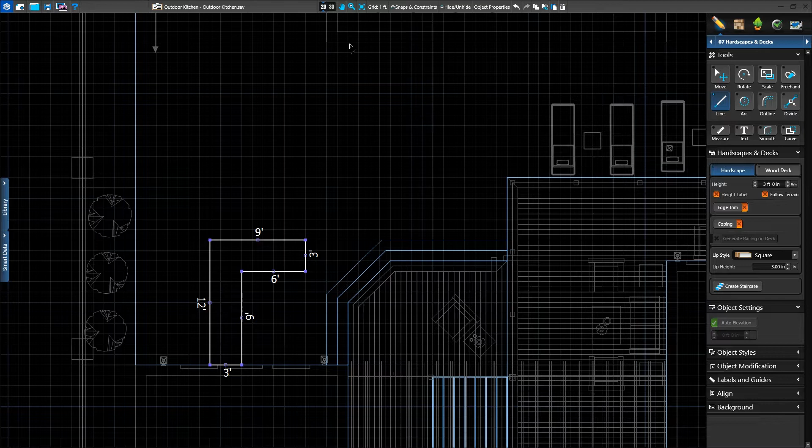With the line tool, we'll plot our dimensions. If we know them, we can even type them in using type-in measurements. Once our shape is complete, we'll make sure that it's set to the hardscape setting and set a height of 3 feet. In 3D, we see our 3-foot tall structure, which automatically includes the countertop.

The countertop is 3 inches tall, and we can adjust the size and style by adjusting the lip settings in 2D. We can adjust our lip height and choose a style. We can even draw a custom lip style.

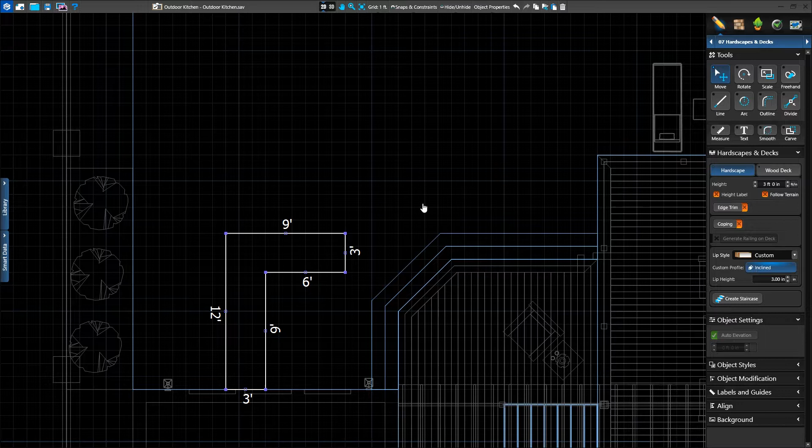Simply draw the lip profile you want with the flat side on the left and save it to the lip style category in the library. Now with our shape selected, we'll choose the custom option from the drop-down menu and apply the new style found in the library. Back in 3D, we see our custom lip.

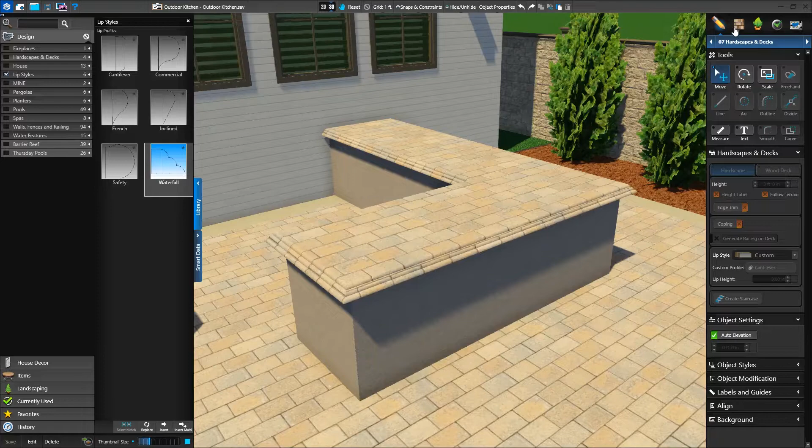Our countertop used the last material applied to a hardscape, so we'll head to the material stage and apply something more suiting for an outdoor kitchen. We'll use a granite or whatever material you'd like to use for the countertop.

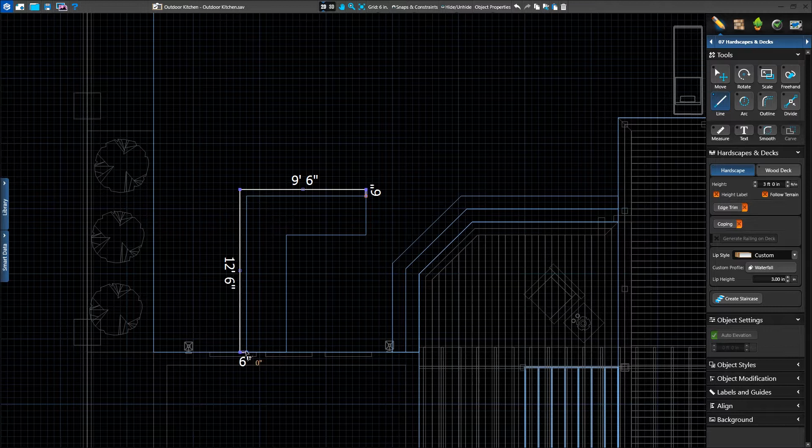Next, we'll create a bar height countertop for bar stools. First, we'll create the wall to support the bar countertop. Using our drawing tools, we'll create a 6-inch wide shape that goes behind the base of our kitchen.

We'll set the lip style to near flush and reduce the size to 1/4 inch, as we don't want to see a visible lip on this portion. We'll set the height of the shape to 4 feet and take a look in 3D.

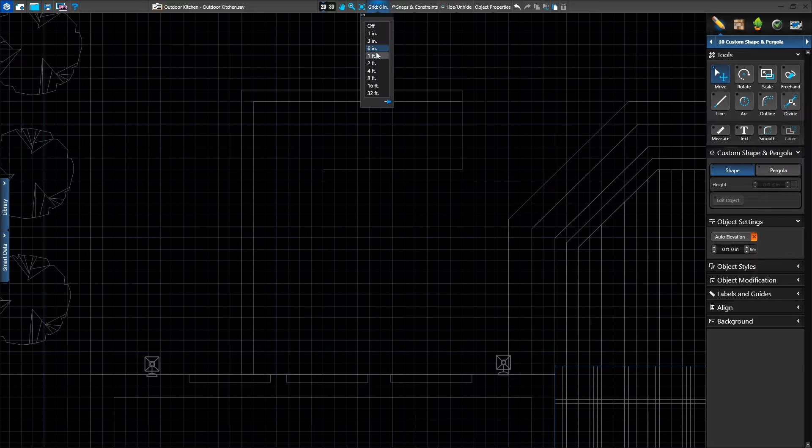Next, we'll create our countertop. We'll do this in the Custom Shape stage. Once in custom shapes, we'll use our standard drawing tools to create our bar top.

Because we created this as a custom shape, we can adjust all of our settings in 3D. We can either move the countertop where we need it in 3D or set the elevation to 4 feet in the panel. We can also adjust the height or the thickness of the counter.

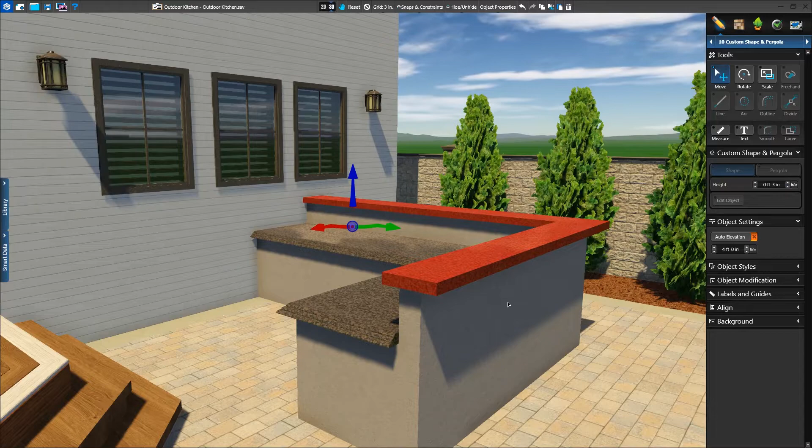Now that our structure is complete, let's start adding accessories. In the Yard Accessories stage on the Item tab in the library, we'll find Outdoor Kitchens.

First, we'll add a grill. We'll pick our favorite and double-click to place it on the countertop. We'll rotate it in 2D and perfect its location in 3D. In 3D, we can use the Move and Rotate tools to put it in place. We'll lower it into the counter and make sure it's where it needs to be.

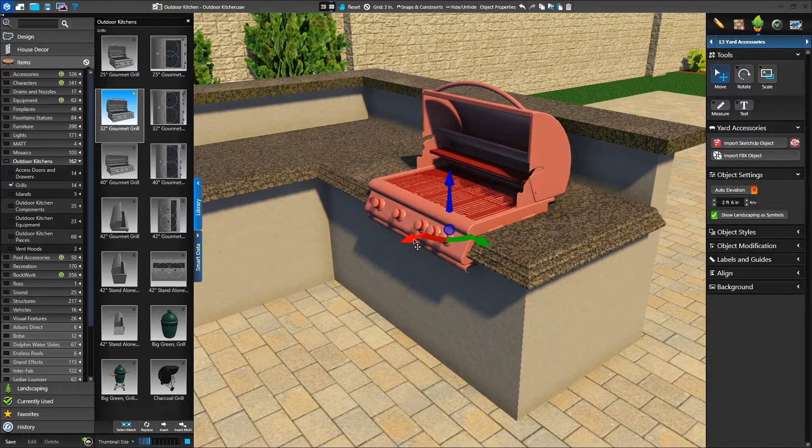It's time for us to add some fire. In the library, we'll open the Visual Features category. Once the fire is placed, we can adjust its settings in the menu. We'll put the fire in place and adjust its height and radius. We'll copy and paste our fire to add it to the other side of the grill as well.

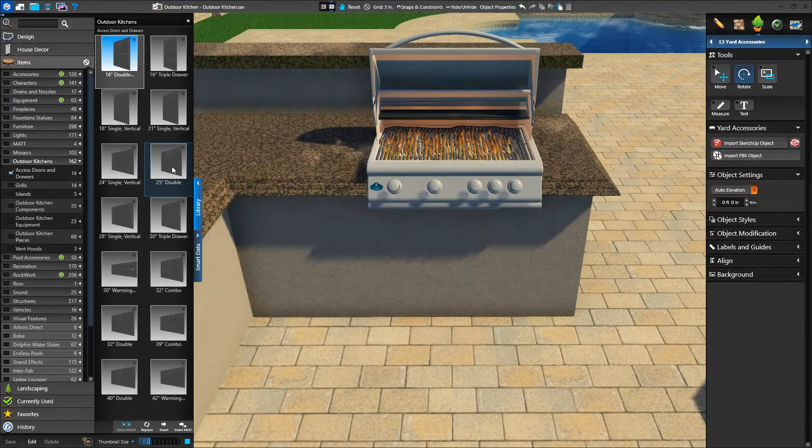Next, we'll add a door. We'll choose the size we want and put it in place. We can use Move and Rotate to position it perfectly. If it's not quite big enough, we can use Scale until it's the perfect size.

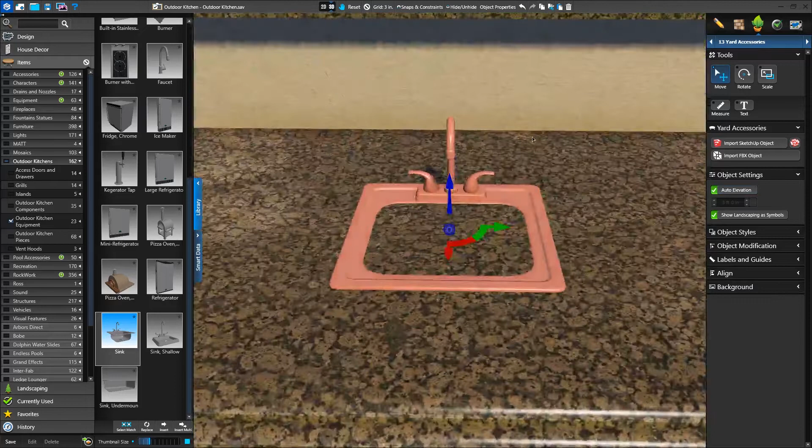We also want to add a sink to our counter. We'll turn Auto Elevation on, or we can adjust the value in the panel menu. We see the countertop goes right through the middle of our sink, so we'll go back to 2D and draw a hole for our sink to fit into.

First, we'll return to the Hardscapes and Decks stage. For the next step, Pool Studio and Vizterra users will simply draw another hardscape, while VIP 3D users will access the Carve tool. When in Carve mode, we can draw holes inside of shapes we've already created.

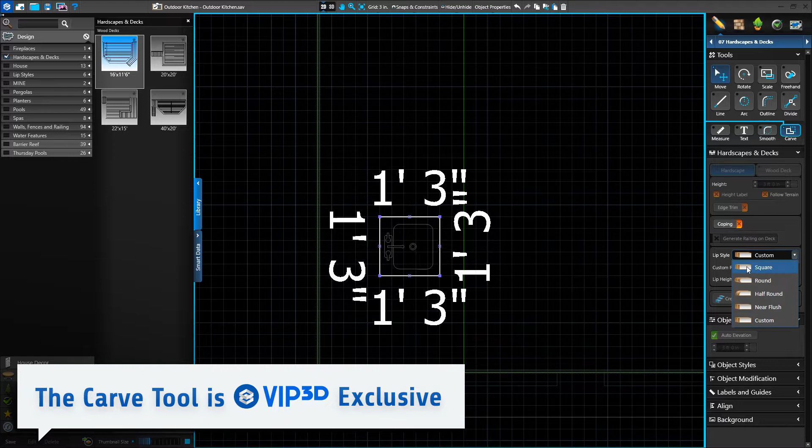While in Carve mode, we'll use our Line tool to draw around the sink. If using Pool Studio or Vizterra, draw the same shape just as a hardscape and adjust the height of the new shape to 1 foot lower than the base.

In Yard Accessories in 3D, we'll use the Scale tool to make sure the sink fills the area completely. Now it fits perfectly. Using these techniques, we can complete our outdoor kitchen. We can add bar stools, plates, beverages, condiments, a smoker, and additional doors.

This is a great-looking kitchen, so let's save it to our library. Since we created our outdoor kitchen in several stages, we'll need to turn on Select Objects from any stage to make sure everything is selectable at once.

Now, we'll click Save in the library. Don't forget you can type into any of these fields. We'll create a new type under Outdoor Kitchens called L-Shape Kitchens. We'll name our shape and click OK.

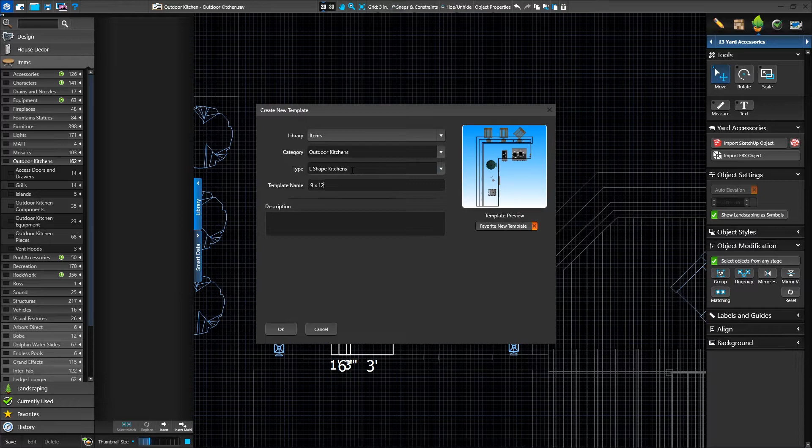Now we have this template to use in any future projects. Next, we'll create the custom fireplace we see here. You can use the techniques we learned in this video to create any unique fireplace design.

First, we'll create the base of the fireplace as a hardscape. We'll draw a simple rectangle and set the height to 2 feet. To create the rest of our fireplace, we'll use custom shapes, starting with our firebox. To work in smaller increments, we can adjust our grid size as needed. We can create our firebox either using carve or multiple custom shapes.

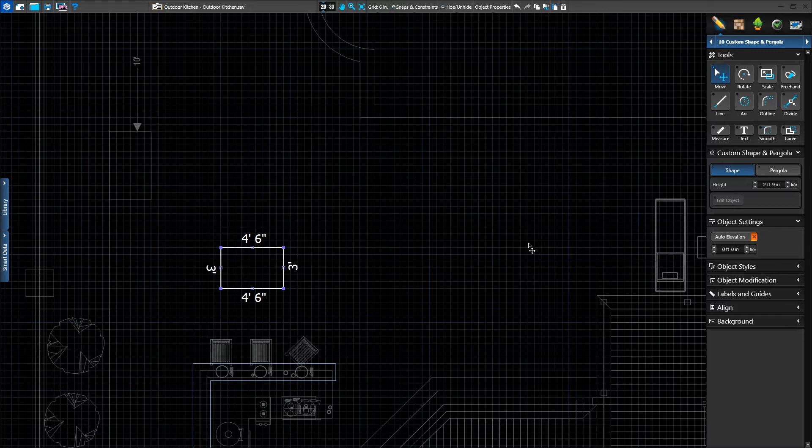To use carve, we'll start by drawing a simple rectangle firebox and set the height, or the thickness, to 2 feet 9 inches. Now we want to create a space for the inner hearth, so we'll enter carve mode. We want the hearth to have a 1-foot border on all sides, so we'll carve a hole, leaving the 1-foot border. In 3D, we can see the hole for our hearth, but we want the back of the fireplace to be solid.

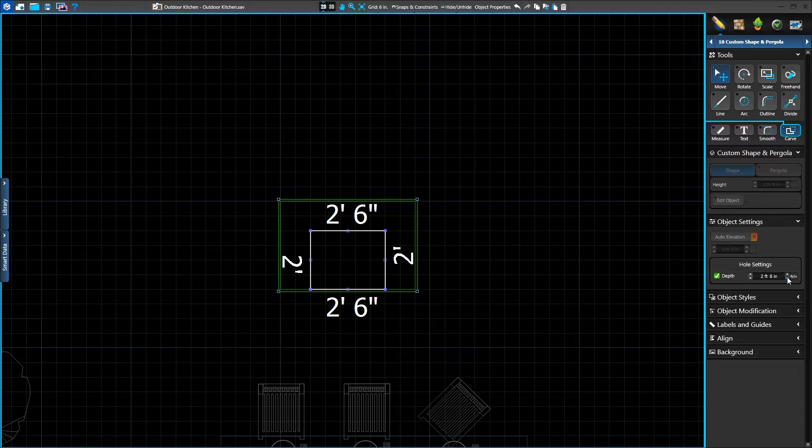Back in 2D, we'll modify our hole. We'll double-click on the hole to re-enter carve mode and select the hole. We'll check the box for depth under hole settings and set the value to 2 feet 8 inches, which is 1 inch less than the full size of our shape. Now in 3D, we can see the hole does not cut through the back and it leaves a 1-inch back on the shape. In Pool Studio and Vizterra, we'll need to draw this as 2 separate shapes.

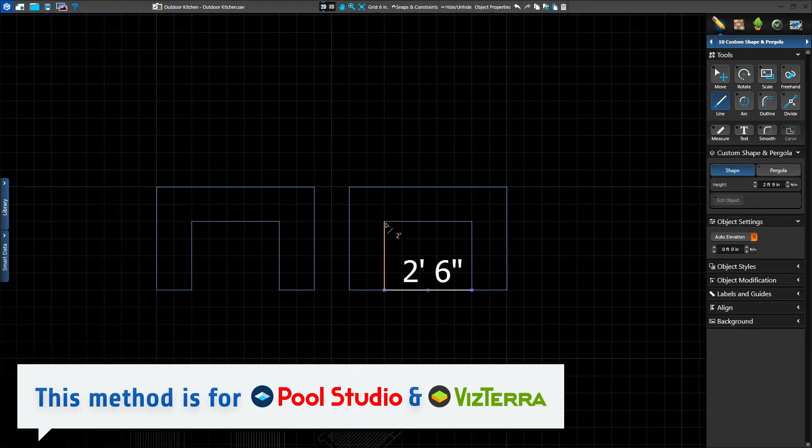First, we'll draw the outer wall of the firebox and set the height to 2 feet 9 inches. Next, we draw the back of the firebox as a simple rectangle and set its height to 2 inches. We're going to design all pieces of our fireplace laying down and rotate upright later. By drawing it this way, it helps us line up the shapes before rotating them upright instead of drawing each piece and rotating them one by one.

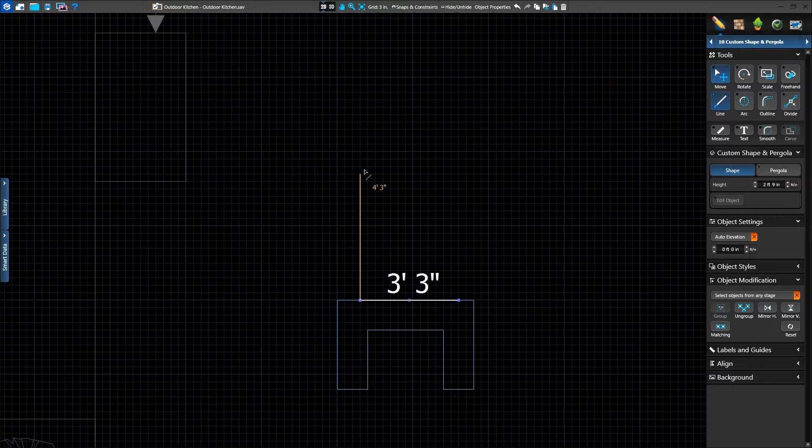Next, we'll create a chimney, starting by drawing a rectangle. We want the top of our chimney to taper in, so we'll use the arc tool in carve mode to create the shape we want. We'll use the arc tool to create the curve, then complete the shape so that the hole is formed. To use the same curve on the other side, we can quickly copy and paste the hole and mirror it under Object Modification. Now, we'll place this hole on the other side of our chimney.

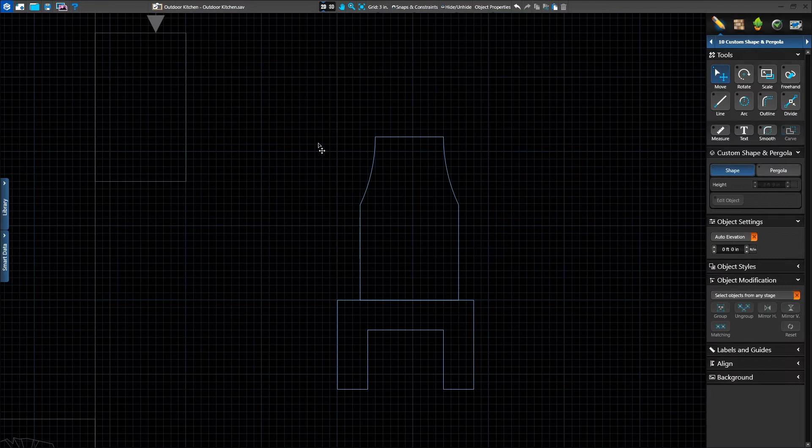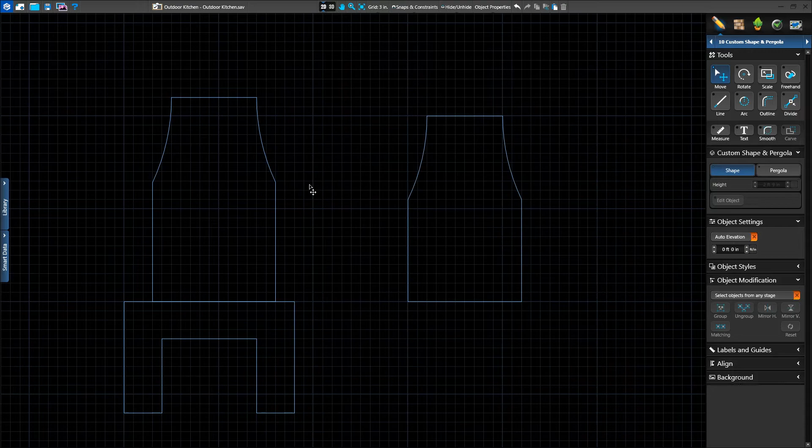If not using carve, we'll use a similar technique. We'll start to draw our chimney, including the arced corners, but stop halfway through. Next, we'll copy the shape and paste it. We'll mirror it and place it next to the original half. We'll select both and press the group button to weld them together. Now we have a single complete chimney.

In 3D, we see our chimney, but we want to make it thinner than our firebox. We'll lower the height to 2 feet. Now we'll adjust the elevation so that the chimney is centered on top of the firebox. Back in 2D, let's add our next detail.

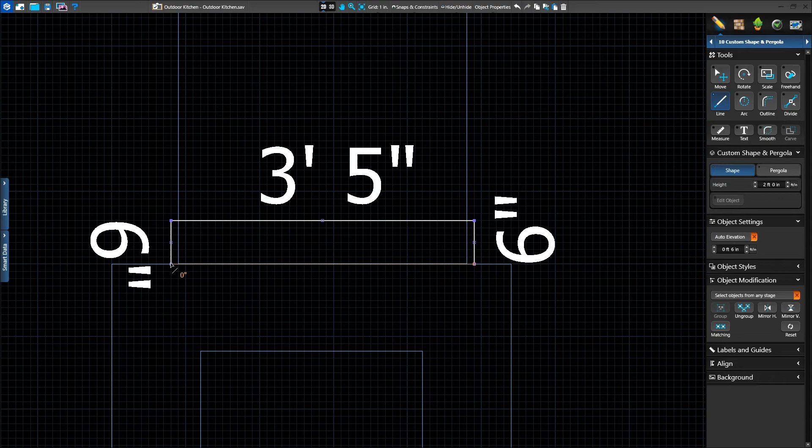We want a row of tiles along the base of our chimney. We'll draw a 6-inch tall shape, just 2 inches wider than our chimney. In 3D, we'll make this shape 2 inches larger and adjust the elevation. Now we have a band that goes around the base of our chimney.

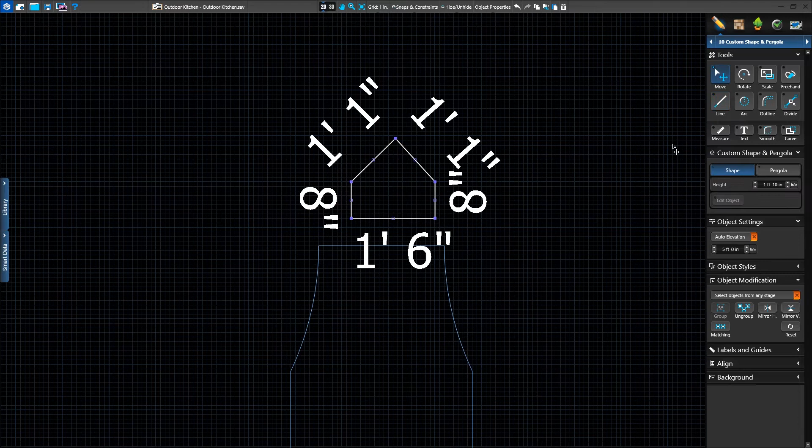Next, we'll create the chimney cap. In 2D, we'll draw the side profile of the cap and enter carve mode to create the opening. If not using carve mode, you'll simply draw the outside perimeter of the chimney cap. In 3D, we'll rotate our chimney cap 90 degrees so that the opening lines up with our chimney. Next, we'll reduce the height and place it on top of our fireplace.

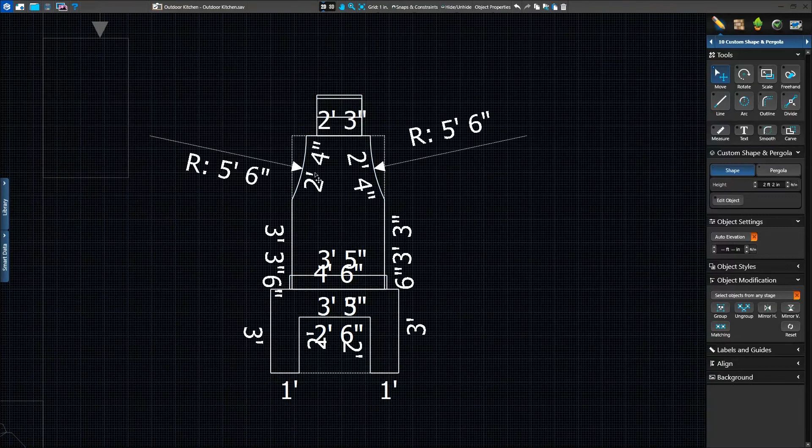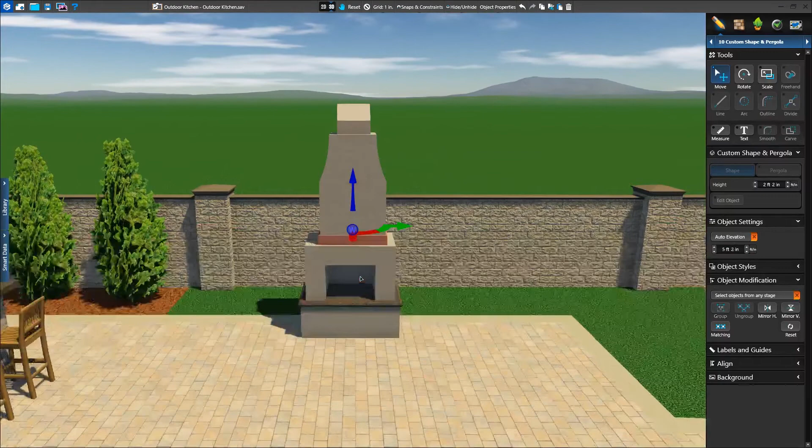Now we're ready to put our fireplace on top of the base. We'll select all components in 2D and then go to 3D. Under Snaps and Constraints, we'll verify the angle snap is set to World Angle. Now with the Rotate tool, we'll rotate the structure upright, made easier with the World Angle snap on. Finally, we'll use the Move tool to put our fireplace on the base.

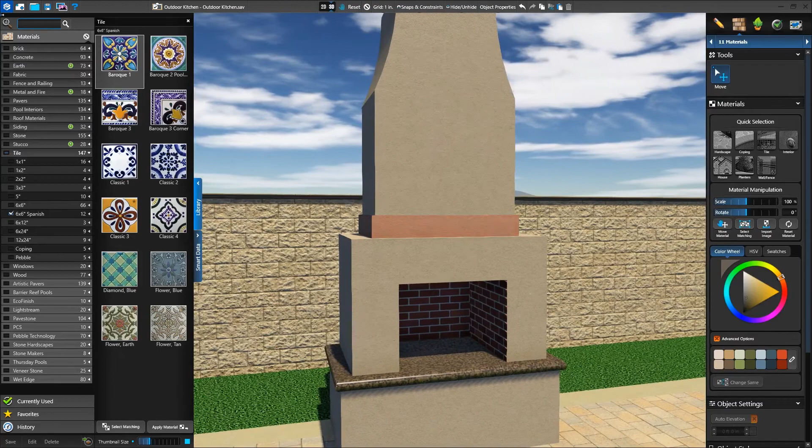Now it's time to select the materials for our fireplace. We'll apply a stucco finish to the base and the chimney. We want the inside of the firebox to be brick, so we'll double-click again on the interior faces and apply the brick materials to each one. Lastly, we'll select our band and apply our favorite 6x6 tile.

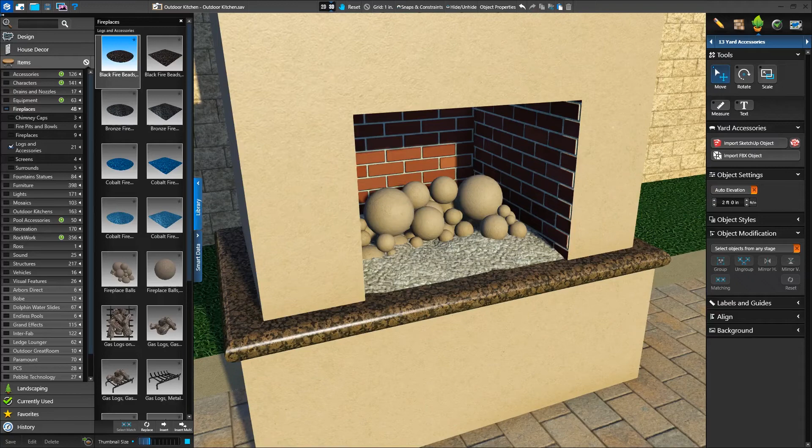Let's add a few more custom details. Back in Custom Shapes, we'll draw a pendant. In 3D, we'll rotate this upright and place it on the front of our chimney. Next, we'll add some detail inside of our firebox. In Yard Accessories, we'll find logs, balls, grates, and glass. Finally, we'll add our fire.

Just like with the outdoor kitchen, we can insert fire in 2D or 3D and adjust the panel settings to make it perfect. Thanks for watching.